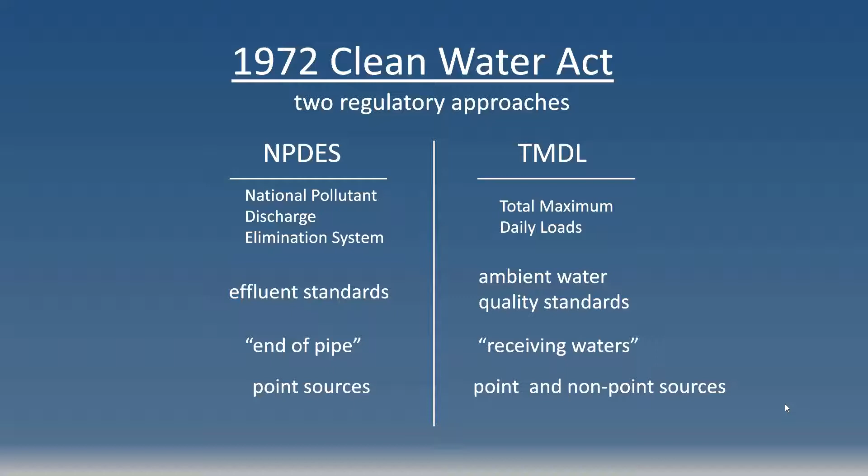Next click, Frank. So again, end of pipe versus receiving waters — what was the actual health and quality of the receiving waters? One more time, Frank. So the NPDES logically dealt with point sources like factories and wastewater treatment plants, and the TMDL program dealt not only with point sources, but non-point sources as well. Non-point sources are typically thought of as stormwater runoff, because it comes from everywhere. Okay, so next slide, Frank.

I'm telling you this because these federal programs really to this day drive what happens at the state and local levels as well. So the National Pollutant Discharge Elimination System is actually implemented at the state level as the Virginia Pollutant Discharge Elimination System. Clever name, I know.

It really manifests itself as the Virginia Stormwater Management Program, or VSMP, and Frank is going to talk a lot about that program today. But it also created this permit called the MS4 permit, which is issued to industries, governments, and so forth. MS4 stands for Municipal Separate Storm Sewer System. It's a program to regulate discharges coming out of these storm sewer systems, which pick up runoff from large areas of land, but ultimately discharge it into water bodies through a pipe. So it's kind of a quasi point source.

The NPDES program kind of drove both of those programs, which the county is acting under. The county has a permit, MS4 permit. But the TMDL program was something that was actually ignored by the federal government for many decades until they were sued by some environmental groups back in maybe the 80s. Some of you might know better than me.

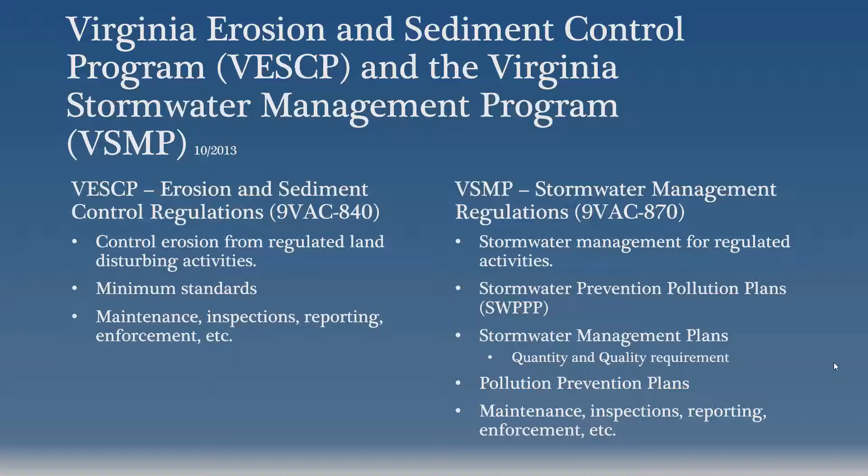So in 2014, July 1, we adopted Chapter 17, the Albemarle County Code, the Water Protection Ordinance. We already had an ordinance, but this was developed based on the new state regulations. The purposes are to protect public health, safety, and welfare, protect state waters, protect property and natural resources, reduce pollution and illicit discharges, sustainability of groundwater sources, and to implement state laws.

So there was a big push or a big change in our ordinance at that time, July 1, 2014. And before I dig into the actual regulations, I wanted to give you an overview of our current program and who is in the program.

So we have an engineering staff that enforces the water protection ordinance, in community development for the front end side of development, regulating all active construction projects and land disturbing projects that are regulated. We have 6 engineering inspectors, 3.5 FTEs of those inspectors are for WPO projects, which are the subdivisions and site plans. 1.5 of our inspectors are for single family — SF stands for single family inspectors. And 1 basically addresses complaints and assists the other inspectors for other issues on their projects.

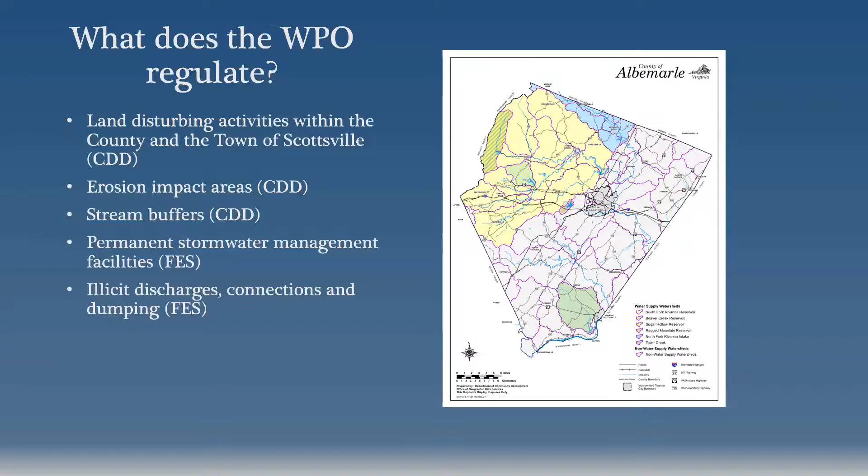So a brief description or definition of land disturbance. From the VESCP perspective it's pretty much the same, but there's a little bit of distinction between the definitions because of the exclusions mainly. It's clearing, grading, excavating, transporting, and filling of land. The VESCP is mainly focused on soil erosion, or the carrying of sediments into streams. And for the VSMP, it's mainly focused on the changes in runoff characteristics from the different types of land uses that can result from these activities — clearing, grading, or excavation.

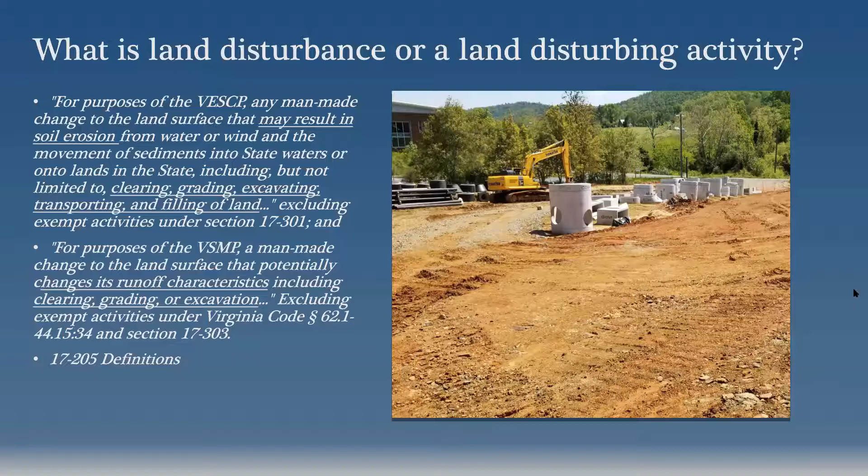So the VESCP regulated activity, I wanted to share with you the different regulations because there are some minor distinctions. The county has adopted a land disturbance area of 10,000 square feet to regulate erosion and sediment control, or land disturbing activities for erosion and sediment control. And we've done this for both VESCP and VSMP.

So we could have really lumped these together, but there are a few minor distinctions I wanted to point out. One is the erosion impact area. That's really focused on erosion and sediment control and agricultural roads that are built within a common plan of development that are converted to the common plan within a 2-year window. You can build an agricultural road today without being regulated, but if you bring in a plan within 2 years of the construction of that road that's part of a common plan, then it would be regulated.

And a common plan is, for instance, Old Trail is a common plan of development. It was by a developer who rezoned a large tract of land, and then they have different parts of the project happening at different times. And it can be different operators also. It doesn't have to be the same operator.

And then on the right are your exempt activities. I won't read them for you, you can see those. And as I mentioned, the VSMP also has the threshold of 10,000 square feet and also the common plan of development. And that's just a stormwater detention facility in the picture there, underground detention.

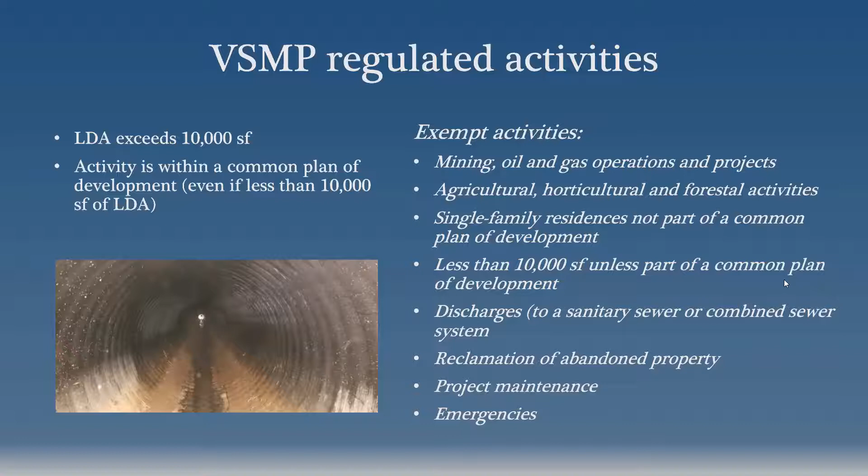Then we require an agreement in lieu of for stormwater management. And then a couple other things there that you see. I'll get to that question here, Kirk, when I get to the end.

VESCP requirements and VSMP requirements. So this is just digging into a little bit of what that means, right? So when you're on the ground and you come in and you propose something, you submit a plan, and then you have to meet certain standards.

And this is the VESCH, the Virginia Erosion Sediment Control Handbook. It's a handbook, I think, from '91, and it hasn't changed much since then. But it includes standards and specifications for silt fence installation, sediment traps or sediment basin installations, construction entrances, inlet and outlet protection on pipes, diversions, check dams. There should be an et cetera under this, because there are more types of standards and specifications.

There's also the MS 19, the minimum standards 19, that we have to look at for how these projects affect offsite properties and things like that. So that's really the focus of the erosion and sediment control measures.

And then through the VSMP, we're focused more on the stormwater side of things. And it's really broken down into two different categories. One is water quantity, like the volume and the rate of runoff, and the water quality, which is nutrient loading coming from those projects.

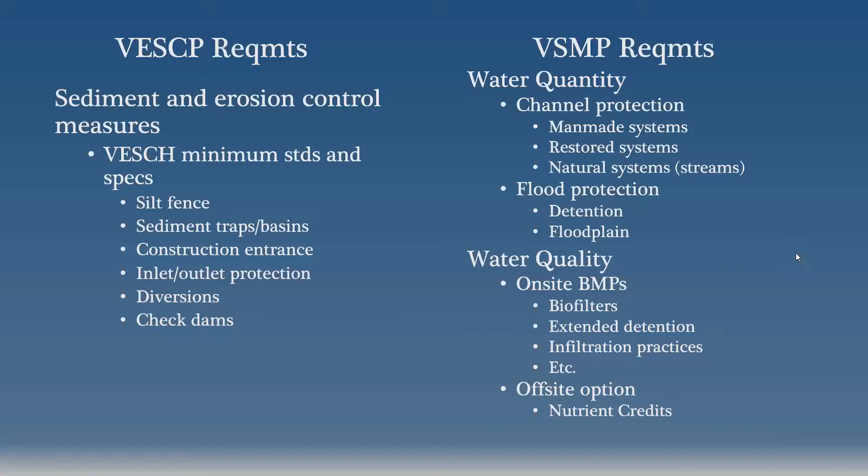So we also have stream buffers in the county. This is not required, it's a voluntary provision that we've adopted, or regulation that we've adopted locally, but it only applies when each erosion and sediment control plan and each VSMP permit is needed. So whenever we have a VSMP plan or E&S plan, building permit plan, any type of plan that requires a land disturbance permit, then we check for stream buffers.

We have all of our stream buffers on GIS. Those are so that we can confirm whether or not there is one during a development type of activity.

Where are these buffers? There's two different criteria here that we look at. Within a development area, there's a 100-foot stream buffer on... I said intermittent streams, that's wrong. So within development areas, it's on perennial streams. I apologize, there's not a buffer on intermittent streams in the development area, just on perennial streams and contiguous non-tidal wetlands.

Within the water supply protection area, those are waters that drain to our reservoirs, drinking water reservoirs, or other rural land. So in the rural areas, there's a 100-foot stream buffer on intermittent and perennial streams, contiguous non-tidal wetlands, or the limits of a floodplain, whichever is greater. In addition, on the actual water supply impoundment, there is a 200-foot buffer from the floodplain of that impoundment.

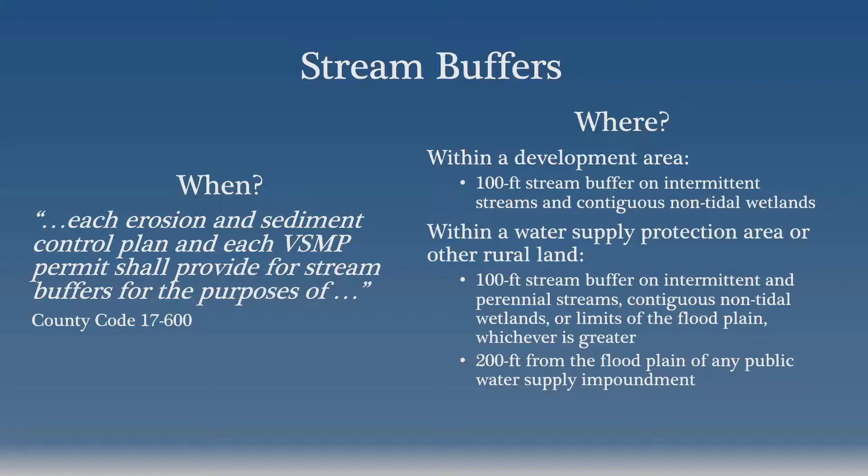There are exemptions from stream buffers, which include these activities. Typically it's like a sanitary sewer line that needs to get to a development, or a road transportation project. Those are VDOT type transportation projects, or roads that will become public that are being built by a developer, for instance.

Silviculture activities, if they follow certain regulations for BMPs. Public airport improvements are also exempt. These are separate from the other ones because they're just straight out exempt, there's no requirement for any type of mitigation. There is a requirement for minimization though, so we do look at alternate routes, for instance, to minimize impacts.

Authorized improvements, these are things that are mostly pre-existing except for number 2 there, which is temporary E&S measures, which we proposed to change in our phase 1A proposals to the board that are going in April 21st, next month. So pre-existing buildings, we do allow some impacts because of pre-existing structures. These are existing structures prior to the ordinance, so it kind of grandfathers them in. And then water dependent facilities and miscellaneous uses like docks and things like that.

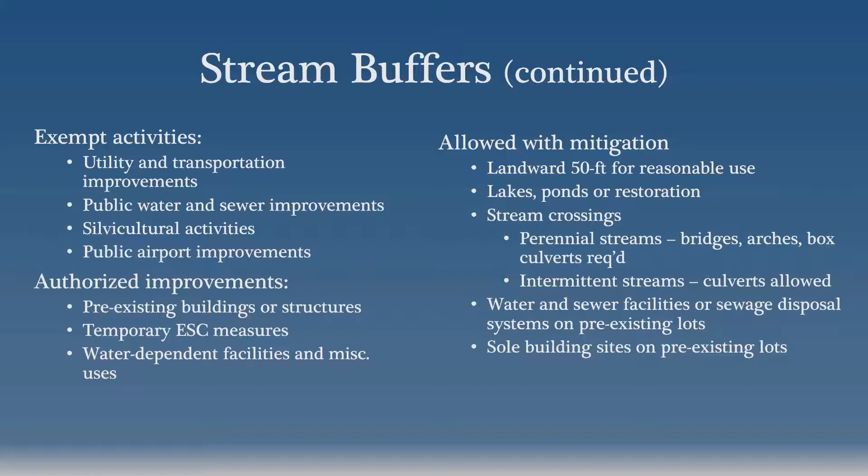And then on the right here, we have impacts that are allowed with mitigation. So mitigation involves replanting, finding a place on the property where you can replant or restore buffers that are not wooded, and protect those areas. So there's landward 50 feet for reasonable use. We've been trying to define that and get a better handle on reasonable use lately. Reasonable use does not mean an extra lot, for instance, but it could be.

Is everybody seeing my screen okay? Because it just kind of... Hello, can somebody respond? It's there, but it's really white. Yeah, it just turned white on me too.

Okay, I'll keep going. Stream crossings, these are mainly for driveways, streets, and roads. And then water sewer facilities, as we talked about, and then sole building sites on pre-existing lots.

And when you have a sole building site, we had one recently in downtown Crozet, old downtown area, and the whole site was within the buffer. So in order to prevent a taking, we still have to allow those to be used for at least a single, for what they're zoned, with some mitigation if they can provide it. Mitigation can also include removal of invasives, so it's not just planting if you can't find a place to plant on your property.

So we do have a couple of voluntary higher standards, and one is the lower threshold for disturbance. There's been a lot of discussion, should we go lower? But we are at 10,000 square feet and the state is an acre. We don't report any land disturbances under an acre to DEQ unless it is within a common plan of development. And then stream buffers, we do have stream buffers. They're not required in this area, but we have adopted that standard or regulation for Albemarle County.

So that's it for the WPO related to land disturbances. We do also do groundwater assessments. We thought this was something we wanted to bring up because groundwater obviously feeds some streams, and groundwater is a valuable resource in this area.

We do require groundwater assessments for these types of developments. There are 4 different levels of assessments required. The single family is the lowest level, which requires, for instance, a drilling completion report for each well drilled and the location of the wells. These are shared with VDH, Virginia Department of Health, who get involved and permit these wells and sewer systems, but this is for wells right here. We don't actually permit those, so it's through VDH.

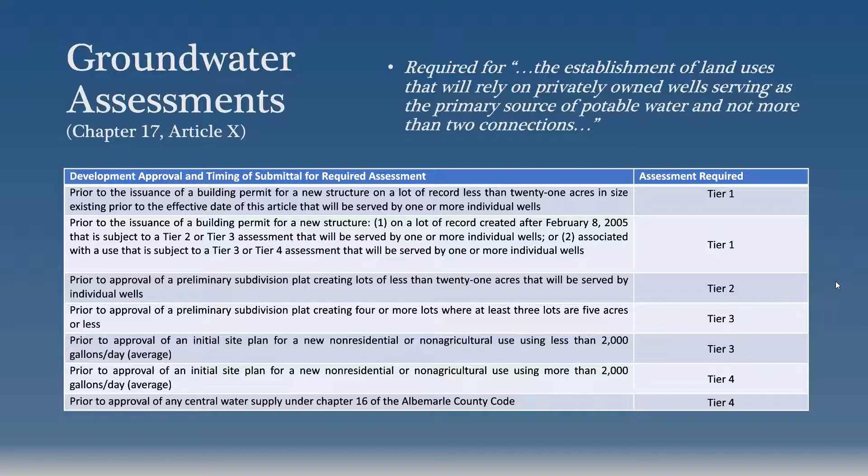But when you get up into the tier 2 and tier 3 ones, you're talking more about commercial type developments, non-residential uses or subdivisions. So we will review those with VDH when those are submitted to us. And with that, I will turn it over back to Greg.

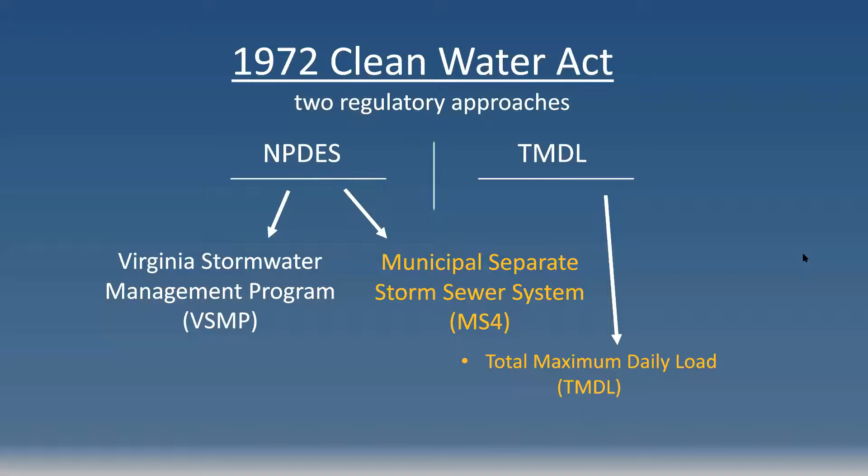So it's a little odd to think that the county is polluting, but I guess we do, just because the land of the county carrying pollutants will eventually reach streams. And so the MS4 permits are issued to localities that have areas they own or operate that lie within a US Census designated urban area.

The Charlottesville area is obviously a designated urban area. So not only the county, but the city and UVA also have MS4 permits and requirements under those permits to minimize pollutant discharges. The 2 big parts of the MS4 permit are what's called 6 minimum control measures. This MS4 permit was first issued to the county and other partners locally way back in 2003. In 2014, these TMDL requirements became part of the permit as well.

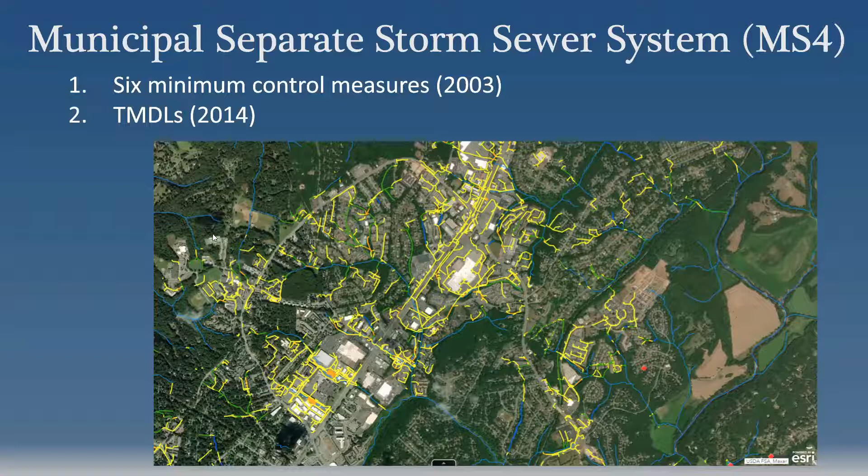I'll go through quickly the 6 minimum control measures because they dictate 6 different types of things we do to basically reduce the amount of pollution that comes out of those pipes into streams. The first 2 are kind of related. Public education and outreach is the first one, and public involvement and participation, which is a little different, is the second one. The city and UVA also have permits and the requirement to do public education and outreach, involvement and participation.

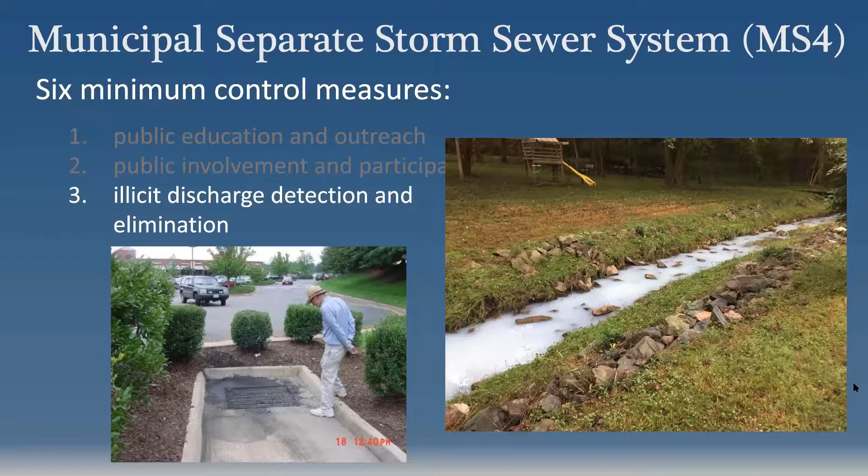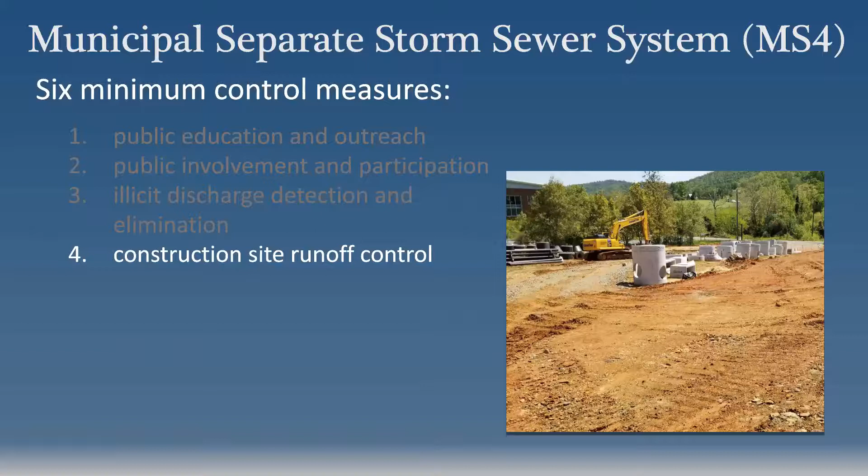Our permit requires us to do the very thing that Frank has already talked about, which is to manage erosion and stormwater runoff from construction sites. And our permit also requires us to manage stormwater post-construction.

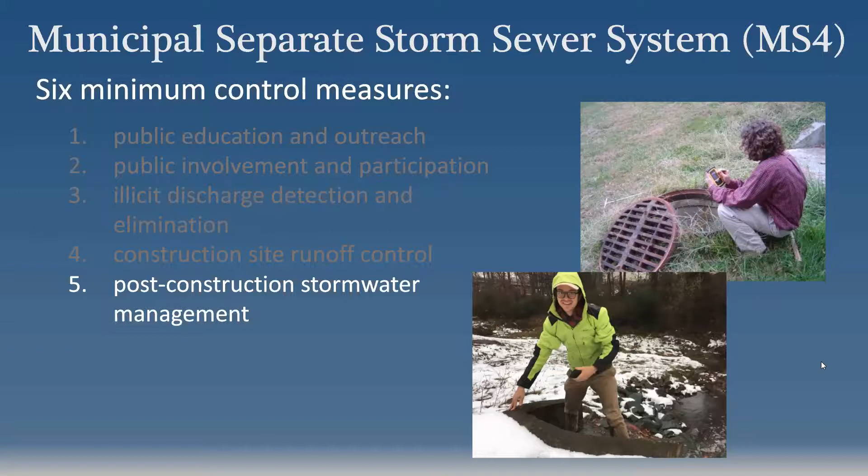Frank already mentioned that his crew reviews plans, improves designs, and approves the construction of these facilities. Once something becomes permanent and is operated day to day, my crew is responsible for ensuring that the 1,100 or so stormwater facilities that exist in the county are operated correctly. That requires us to reach out to homeowners associations or property owners to say we're here to inspect your facility, make sure it's working correctly, and we'll work with them to do whatever's necessary to keep those functioning correctly.

The last minimum control measure is simple pollution prevention and good housekeeping on county properties, whether it's our buildings, parks, or schools - public schools are obviously under our MS4 permit as well. We just need to do the right things in handling materials so that we're not contributing pollution unnecessarily into the storm sewer system.

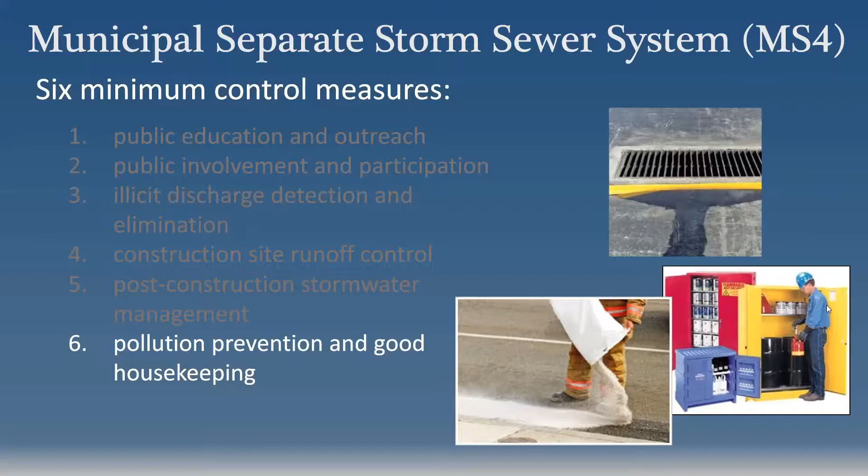So that was the six minimum control measures. As I said, in 2014 I believe it was, these additional requirements came out related to total maximum daily loads. I haven't explained what those are yet, but basically a total maximum daily load is the maximum amount of a particular pollutant that a water body can handle before it becomes impaired. It's a horrible acronym - people trip up on it all the time unless you're really in the business. But what it translates into is a recognition that a water body is not healthy, and it's a plan to reduce the pollutants discharging into that water body enough so that it can sustain its designated uses like swimming, fishing, water supply, wildlife support, etc.

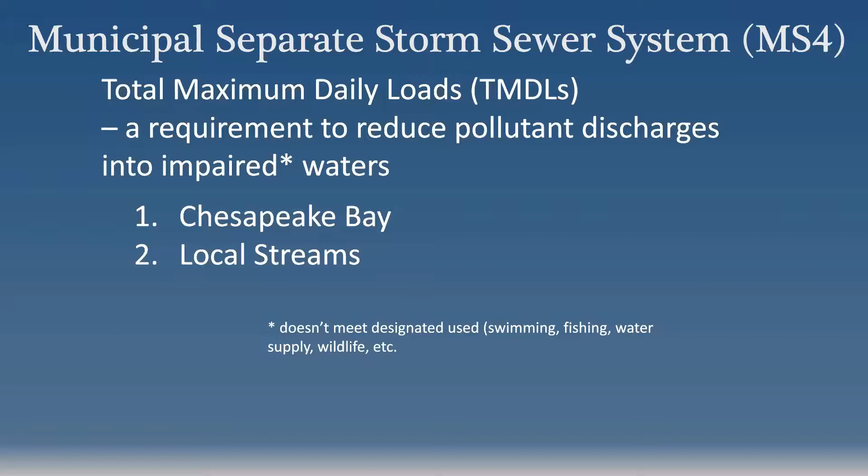We're within the watershed of the Chesapeake Bay, and we have local streams that are impaired too. So between the Chesapeake Bay being impaired and some local streams being impaired, we have a duty to do things that will not just keep things the same, but make things better by reducing the amount of pollution discharged into these water bodies. I'll describe how in the next few slides.

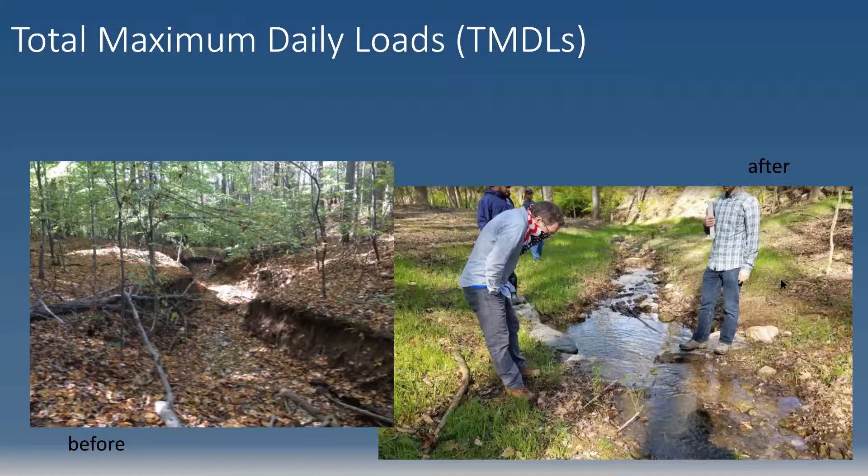Some of the most cost-effective ways to do that are - can you click one more time, Frank? I feel like some text is missing. There we go - stream restoration projects.

Stream restoration projects are kind of new, they've been around for probably 20 or so years. Basically it's a capital project to address the incision of streams. If you were listening a couple weeks ago to Scott Clark talk about the legacy of impacts to our watersheds and stream channels, we have a lot of streams that are not very stable. You can see the picture on the left shows some pretty steep banks with no vegetation - they're clearly unstable. Every time you get a big rain, more of that sediment is washed into the stream itself and carried downstream, with nitrogen and phosphorus attached to it, et cetera.

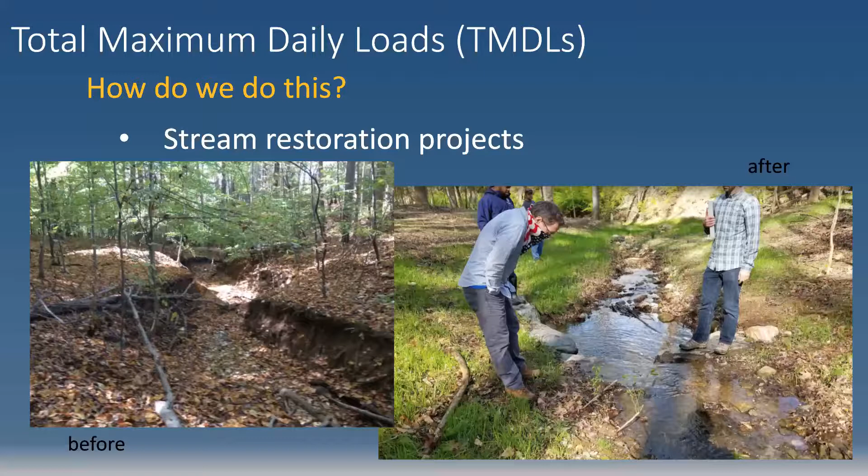One of the things we've been doing over the last 5, 6, 7 years is working with consultants to design stream restoration projects. The picture on the right - now when we get a lot of rain and that river or stream starts flowing, the water can flood out onto the banks, so there's less energy concentrated in the channel and little or no erosion happening. Not only does that not create more erosion, but it actually allows a lot of the pollutants to settle out in that area so that the water is cleansed.

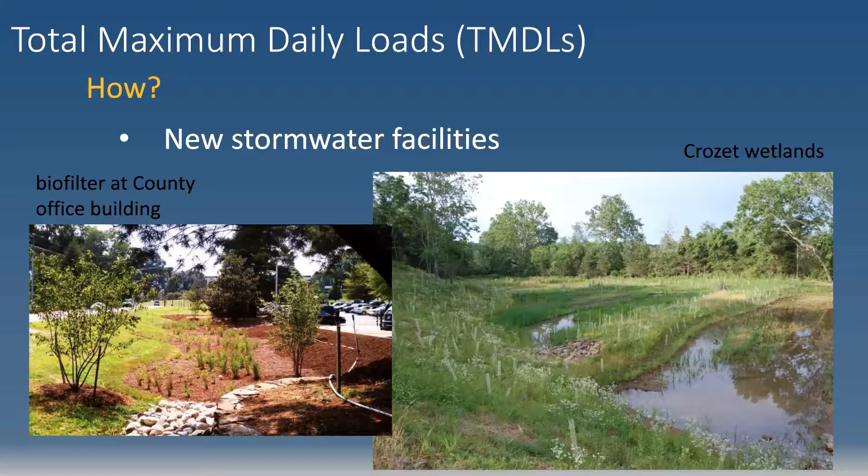One more last way is that we'll take existing facilities that are maybe just big detention basins, not much going on in them, and we'll convert them into, in this case, wetland systems. So the water washes into a wetland cell. There's a lot of plants growing, a lot of biological activity. The water can slow down, so there's some physical gravity fallout of pollutants and stuff. It makes the system work a lot better if you add features to it like wetlands.

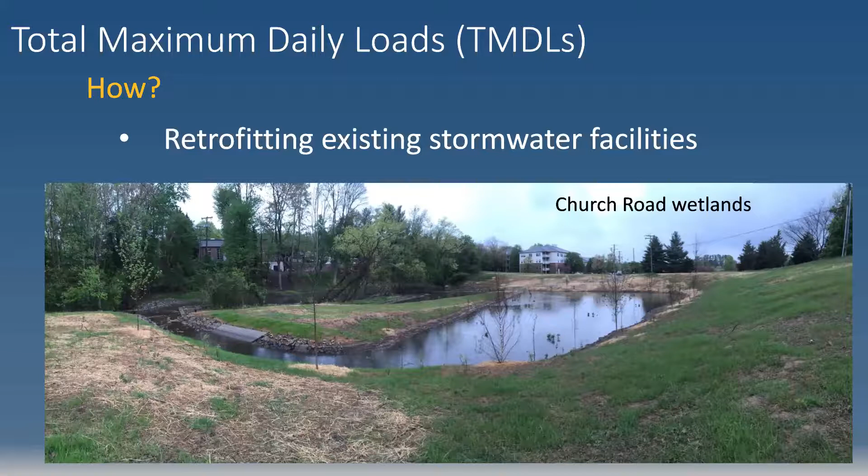Okay, next slide. And then lastly, we actually just started a street sweeping program at the county. I don't know if anybody's heard about that. It's really just been going on in the last year. We're working with the City of Charlottesville Public Works Department, basically paying their crews to go out and sweep some of the streets in the county. And that street sweeping picks up a lot of the pollutants that fall out in the street, so that you collect them before they basically get pushed off from the next storm. So that's another way that we're getting a little credit towards these requirements to reduce pollutant discharges in the streams.

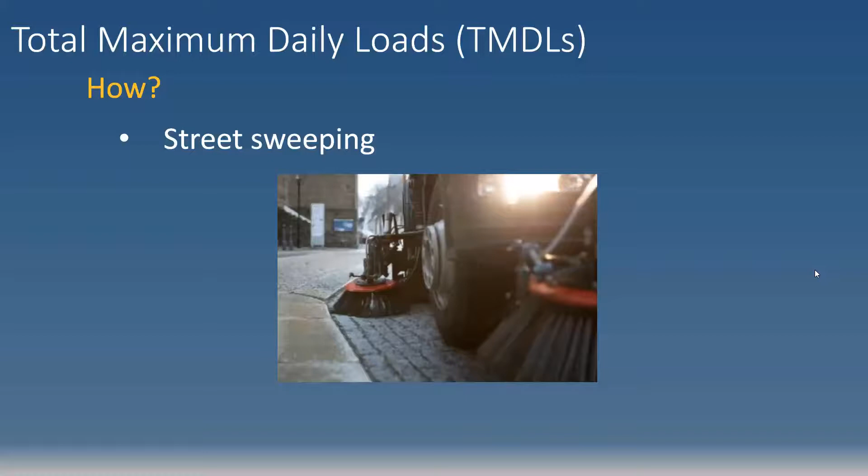By the way, the TMDL has a pretty complex accounting process where we have to essentially document the effects of all these projects on the pounds of sediment, phosphorus, and nitrogen getting into streams. We have long-term targets we have to meet, or we get into trouble, whatever that looks like. We're actually doing pretty well, just because we have a supportive board who provides the resources we need to do these projects. Last slide, I think.

So I wanted to touch on some other programs that we implement that are sometimes more related, sometimes a little less related to water quality. One thing is the Albemarle Conservation Assistance Program. It's actually implemented through the Thomas Jefferson Soil and Water Conservation District, but we provide funding to support homeowners or property owners that want to incorporate stormwater management or runoff reduction onto their properties. So we'll actually support financially some of the expenses they would incur to do that.

The county operates 6 state-regulated dams that are not really water quality features, but related to water resources nonetheless. And that takes money. We just spent over $2 million at the Hollymead Dam to make sure that it would sustain the largest theoretical storm that is possible. So it's just another program that takes some of our resources.